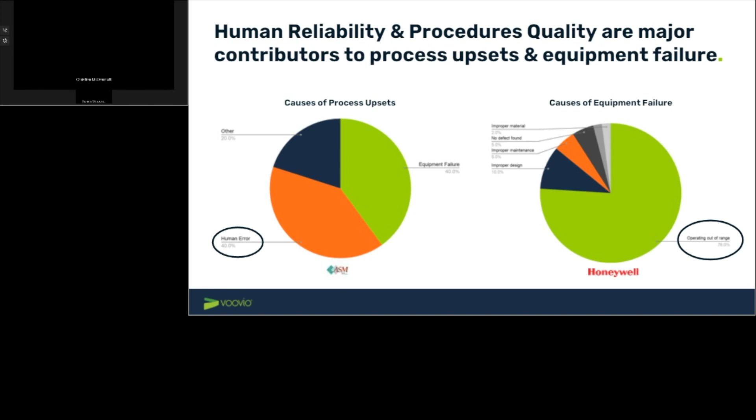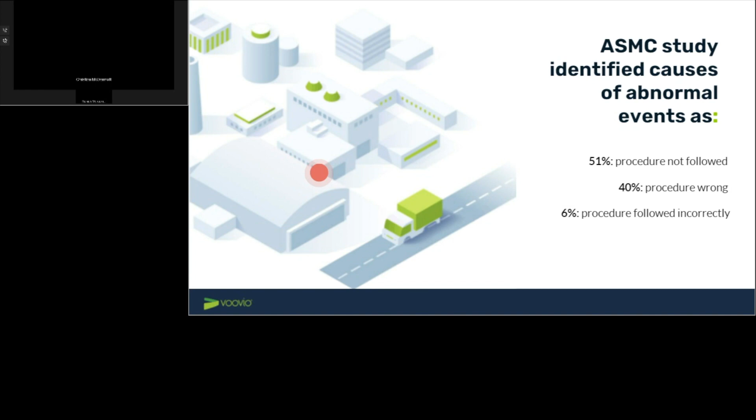According to some more data from the ASM consortium and Honeywell, we know that a significant cause of process upsets is caused by people. We're human, we make mistakes. And when you actually look at equipment failure, the major contributor here is how we humans operate that equipment. And we know that a major root cause of misoperation is actually related to procedures, so that they're either not used, they are wrong, or they're not followed correctly. And this is where our webinar today will really focus on: how can plants improve that interaction with the equipment and the overall effectiveness of people who have to operate that equipment.

So what's the solution? Well, we're going to show you a solution in a second, but let's remember, technology and automation will not solve this people problem we are talking about. Why? Because you cannot automate all field operator tasks. There have been studies done by McKinsey and others that over half of those tasks will still require people.

And Francis will be able to relate to this slide very well here because he lived through operations for 30 years and in plant leadership roles. The more we automate our processes and the more reliable our equipment is, the fewer opportunities to learn from experience exist. So the question is, how can we expose field operators to all the situations and procedures they may have to execute in such a way that they learn and know them? And how can we improve procedure quality, clarity, and adoption?

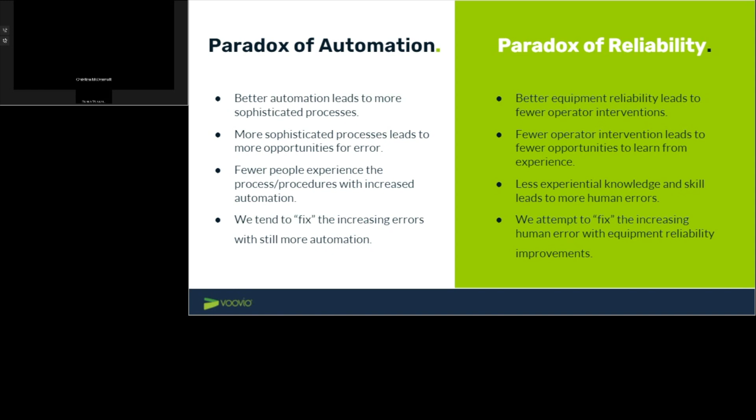You know, the industry has been very good at focusing on equipment reliability, availability and productivity of the assets. But what about the people? And this is where we're going to focus on. So I'm going to share my screen. So give me just 1 second. And we're going to talk about the knowledge automation platform.

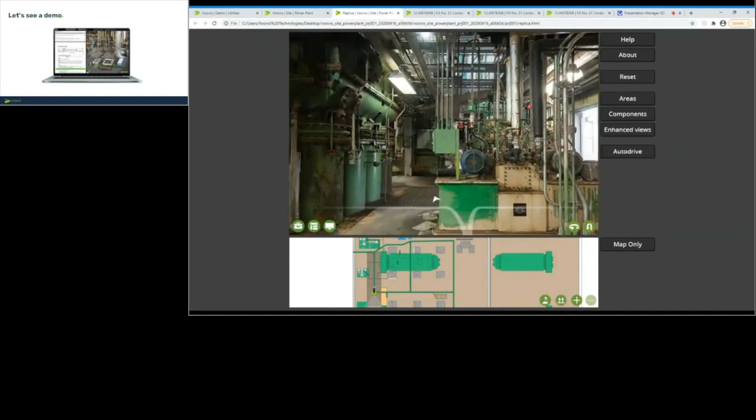We're going to show you how you can have a knowledge automation platform for your field operators, starting with this digital replica. I'm sitting here remotely, logged into my laptop, and I'm going to walk through it. This is the basis of the system we're about to show and explain. It's a real plant environment, accessible on any screen, tablets, laptops, whatever. I'm using a mouse here to walk through a digital replica of a real plant.

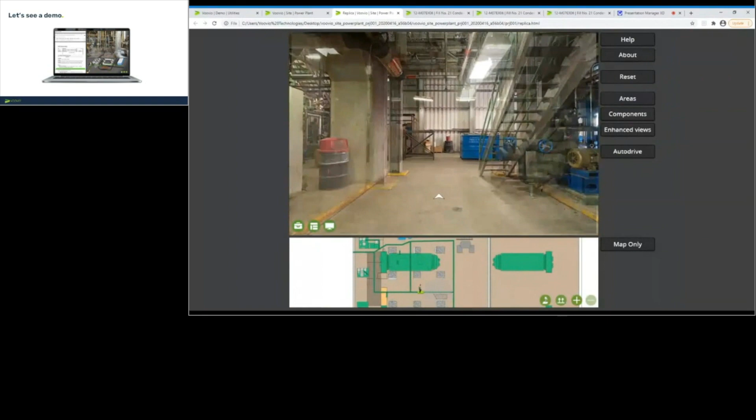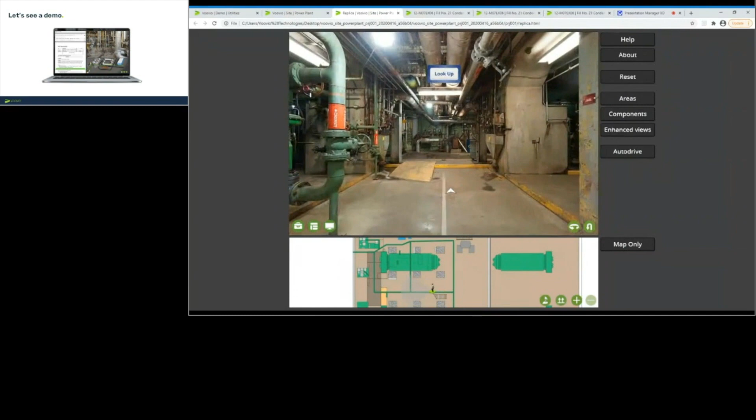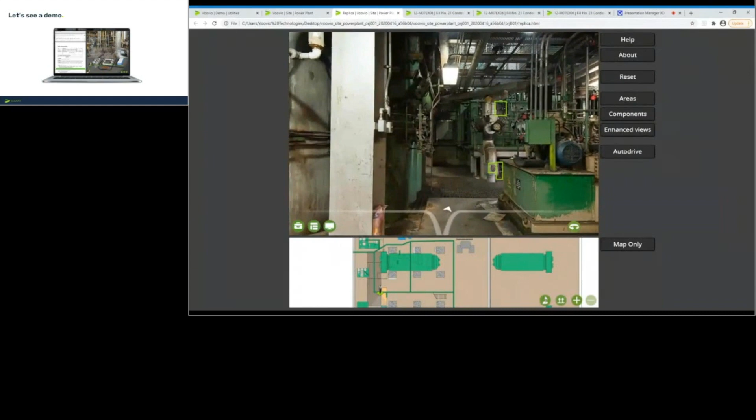The unique thing here is this is built using single images, so it's photorealistic, a real representation of the plant. You have the same degrees of freedom as you would in real life in terms of being able to walk around, navigate, and interact with the equipment. You can turn corners, follow different pathways, even look around at any location. You really have that immersive experience.

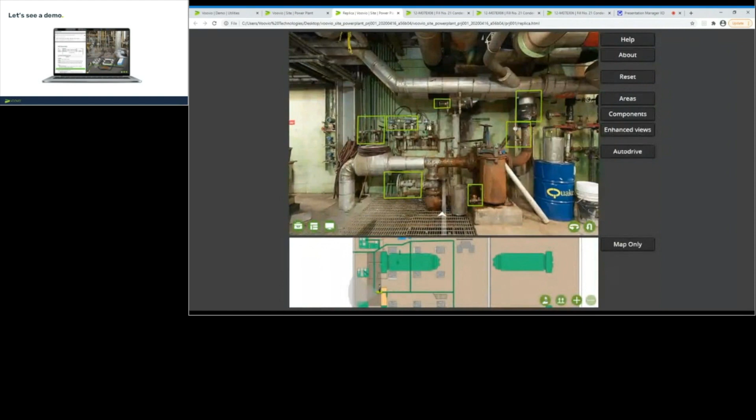Field operators or maintenance technicians, when they walk around the replica, will see tagged pieces of equipment. In this case we've got valves and instruments, but you can also tag larger items like vessels, compressors, pumps. You'll notice there's a label when I hover the mouse over it. When we're in this detailed view, you get a very close-up view of that item. Importantly, we can also simulate the real functionality of that piece of equipment. In this case it's a wheel valve, but there are tons of other things that can be replicated: control panels, switches, lights going on and off, pressure gauges, hoses, bleeds, plugs, you name it.

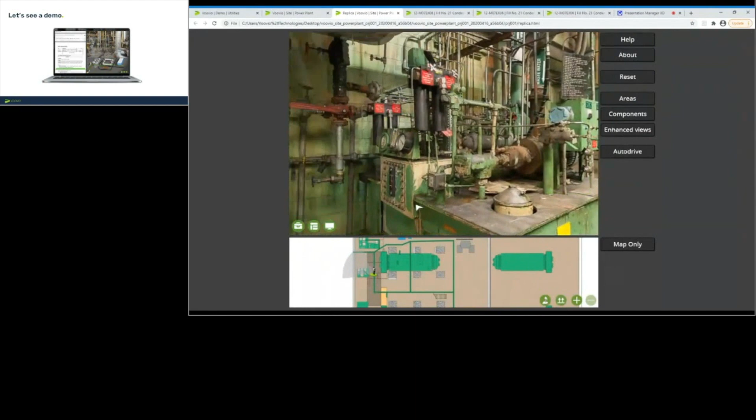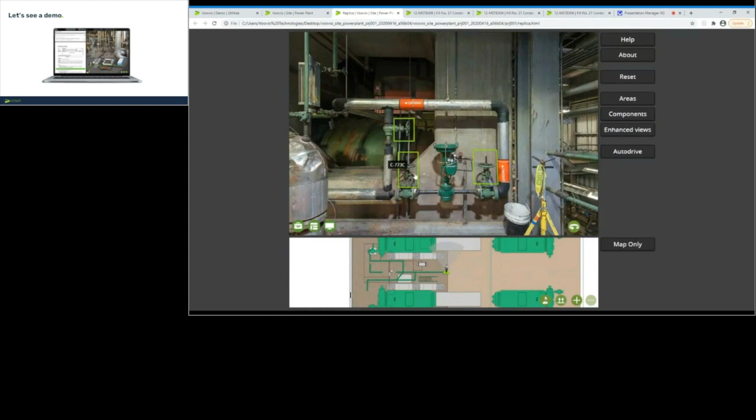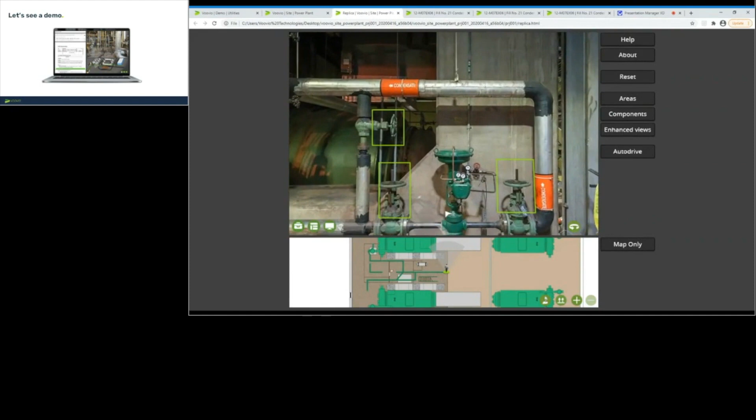A really important feature here for field operators and anyone in the plant environment is that all these tagged items are listed in a searchable index. So if you want to find, for example, a recirculation line, you can just type it into a search box and click on the item you want to find, and it will take you straight to that component. Operators can find things independently, regardless of their level of experience. And remember, this is accessible 24/7 on any device, so you no longer have to rely on those highly experienced SMEs for everything, for planning, for debriefing, and so forth.

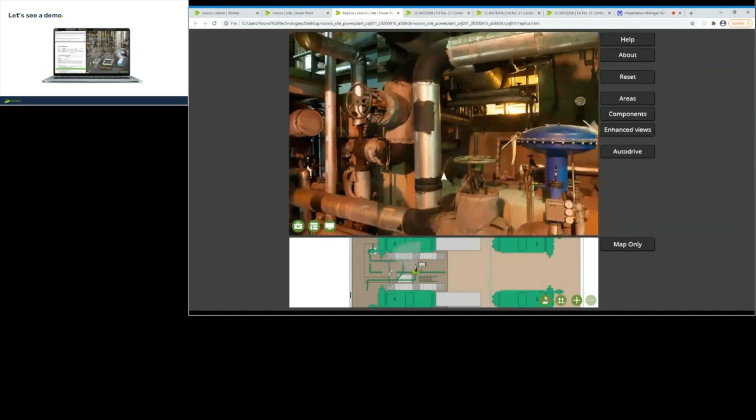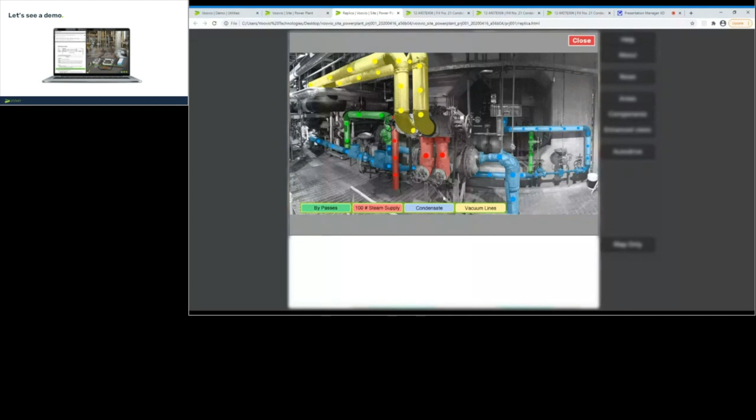The other thing I want to highlight are what we call enhanced views. These can be embedded in any part of the replica and really bring the equipment to life. You'll see these color-coded icons at the bottom, and you can toggle between them, activate them, and turn them on and off. Here you'll see the lines, the flows, have been activated. Taking that a step further, what is really popular are complex manifolds, in this case. We can activate the flows and even the valves, so we now have interactive valves in this enhanced view. This has a huge onboarding and refresher value, and any level of experience can benefit from this.

You'll see in the bottom right here, the valve I can click on and open, and you'll see the flow now corresponds to the state of that valve. You have an unambiguous view of a section of your real plant, which has huge value. So that's the digital replica. This is important because it's the basis of what we're going to continue showing.

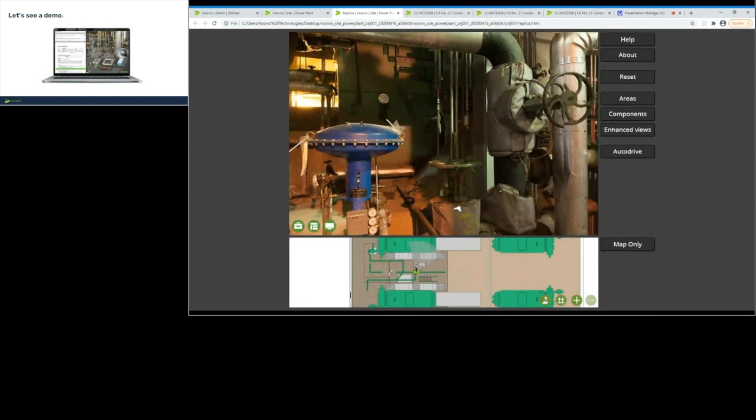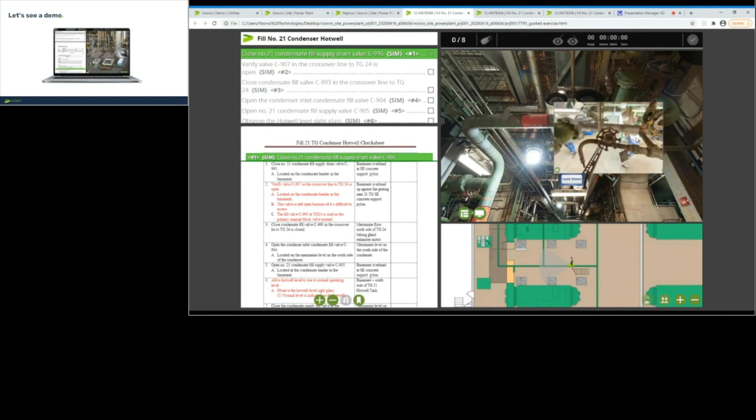So let me show you how this works. I'm going to execute the first couple of steps here. You physically have to interact with the valves, confirm you've completed step 1, and the system now takes you to step 2.

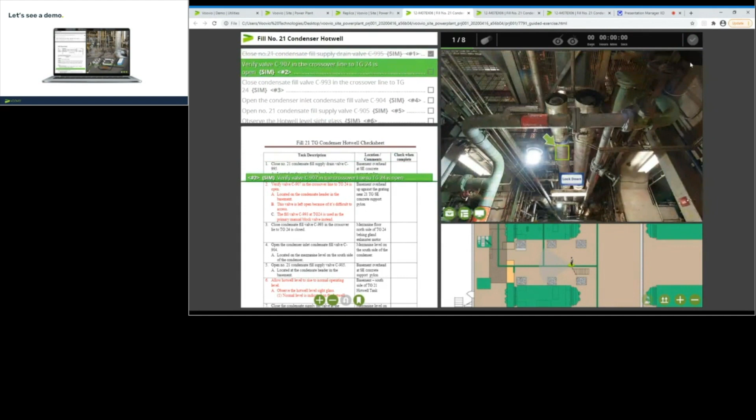You'll see there's a green arrow guiding you through the procedure. It's very much like a virtual subject matter expert talking you through it. You even have these knowledge snippets that appear—in this case, a piece of text that tells me why this valve is always left open.

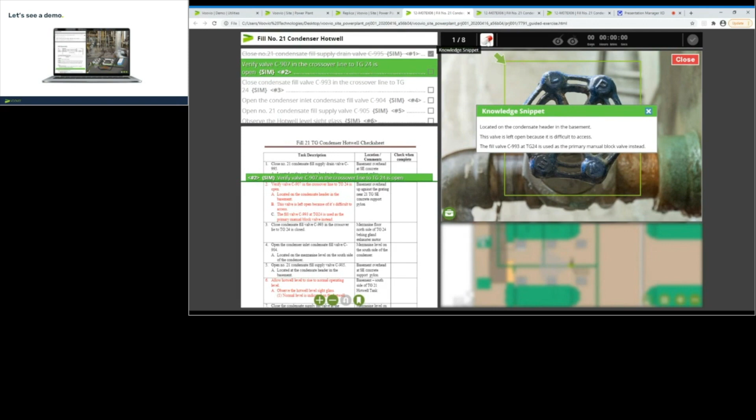This is a knowledge capture and transfer tool where you can add videos, cautions, warnings, notes, and other data important for this specific step. So knowledge snippets are very powerful for enhancing the knowledge and competency of operators across procedures.

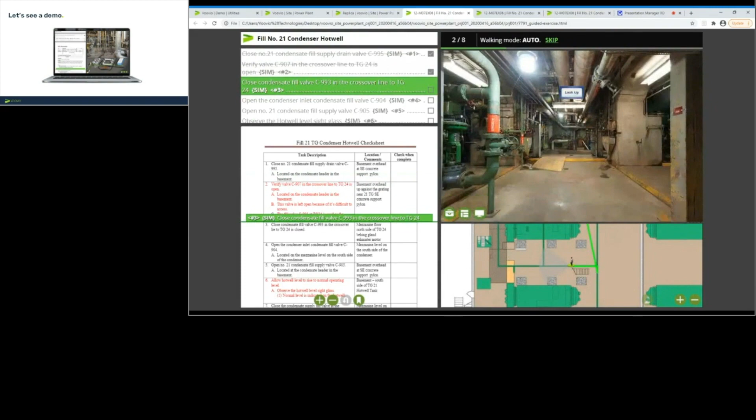So I finished that step, and now it's going to walk me to the next step. It's very much a self-paced guided simulator designed for all levels of operators. However, it's a great onboarding tool, or useful to review a startup procedure before you have to execute it in the field.

We actually have some customers now using Voovio as they prepare to start up after Storm Uri. Unfortunately, a lot of plants in Texas and Louisiana had to shut down, so this actually enables them to be prepared and start up perfectly.

But what about measuring the skills and competency of organizations for specific procedures? Now, this is a test simulator, the same as I was showing you before, but the difference here is that you get immediate feedback on what you're doing correctly or incorrectly.

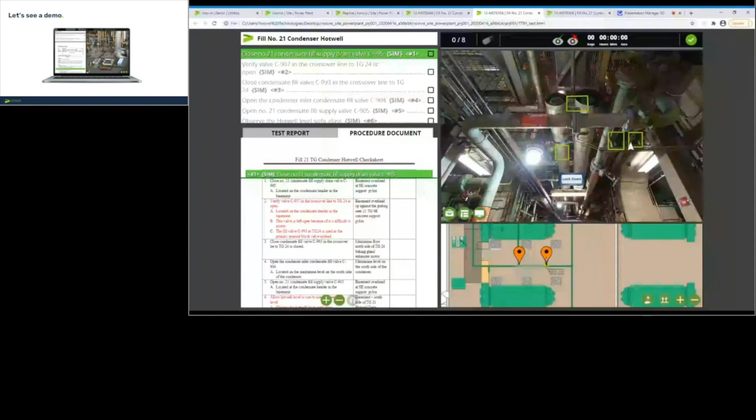So let me do the first step correctly. I'm going to close this valve—pretty sure this is the right one—and confirm. You'll see on the left I get immediate feedback saying the action was completed correctly.

So what about making an error? Let me walk down to where we were earlier and interact with the same valve, and I'll crack this one open instead. Confirm, and you'll see I get immediate, real-time feedback again, with a piece of data showing me which valve I touched, which was the wrong one.

Now, all of this data is really powerful. First of all, it's visible in the form of a report that the operator will see and can download, but it's also automatically saved in a cloud platform, and you'll see my record on this procedure.

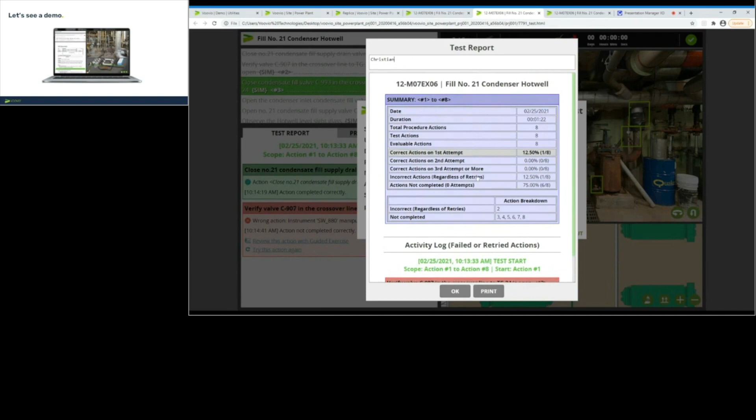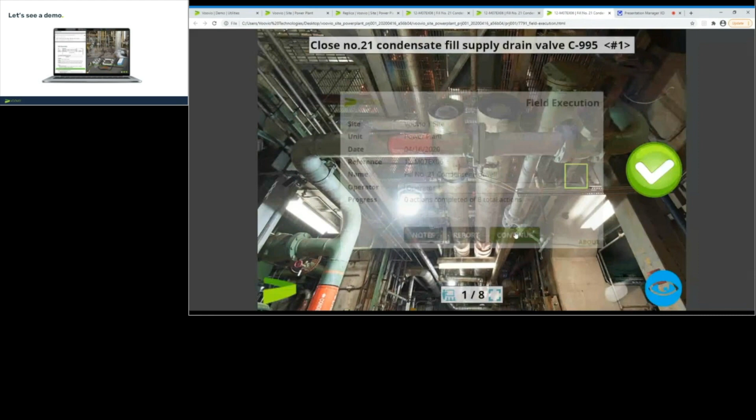Very powerful. Fran's going to talk more about the data that's actually analyzed and available in a kind of people dashboard later, which allows you to reflect on and measure skills and competency on specific procedures. So that's the procedure training part—learning, practicing, and testing.

But what about when you go into the field and you want that visual aid? What you're looking at now is something you'd have on a tablet or another phone device. Very easy interface, and this is all drawn directly from the simulators. You have your action check step at the top, and an image drawn from the digital replica where you find this component or piece of equipment.

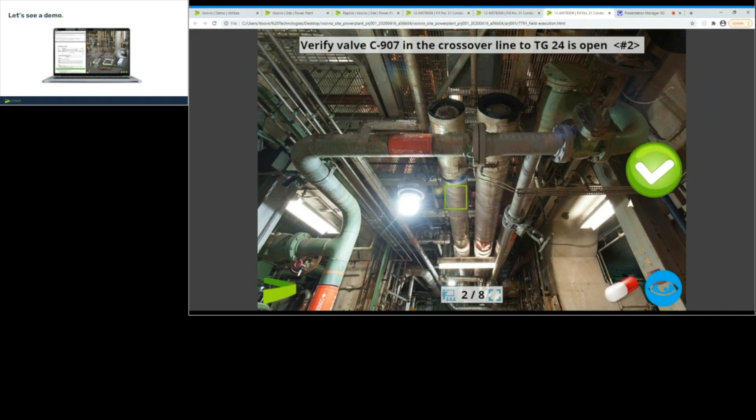And if you need a detailed view, you can toggle between the detailed view and the pathway view. So when you're in the field, you really have that visual verification that you're in the right place. You press the green checkmark to move to step two, and of course you can access knowledge snippets in the field as well—incredibly valuable there.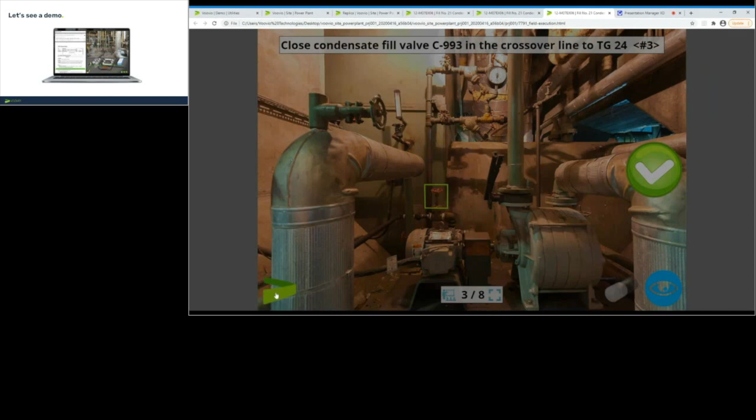There's also a note-taking capability you can utilize. Again, all of this data is stored and captured in the cloud and is readily available, analyzed in the form of dashboards and reports. I'll quickly show you the report that's generated at the end, with all the information including timestamps, notes, and by whom it was completed.

So, a very powerful tool. With that, I'd like to pass it back to Fran Montemuro, who's going to continue the presentation.

Okay, thank you, Christian. So let's talk about the benefits resulting from a Voovio project implementation. Some of the benefits realized with our customers—the first one Christian spoke about was procedure clarity. This chart depicts on the y-axis the number of procedure steps in a given procedure, before and after a Voovio implementation.

If you look at the second set of bars, when we went to the site for this procedure, there were 28 procedure steps for the operator to execute. Once we walked this particular procedure with the SME and detailed every executable action the operator needed to perform, you can see the orange bar was well over 125 executable actions for the operator to perform.

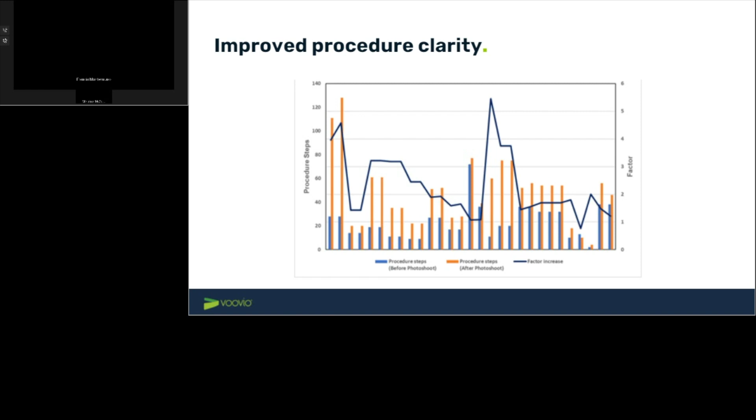So the result is very clear, concise, executable actions for the operator. There's no ambiguity with that procedure or any of these procedures following the implementation of Voovio.

Another benefit our customers are realizing is improved competency over a shorter amount of time. This chart depicts competency on the y-axis and time on the x-axis. The gray arrow shows what we find in most petrochemical and refinery sites: onboarding, orientation, job shadowing, and then some type of verification.

With Voovio, the time to competency is accelerated. Productivity gains upwards of 50%. That results in less overtime and less costs associated with onboarding or qualifying that operator in the area. Why is that? Because operators can execute these procedures independent of the availability of an SME, practice, and then when ready, take a standardized test to document and show their competency.

In addition, as Christian mentioned, there's the field execution tool. So we are seeing competency gains of 100% because they are practicing entire procedures. They don't have to wait for equipment to be down or to be available.

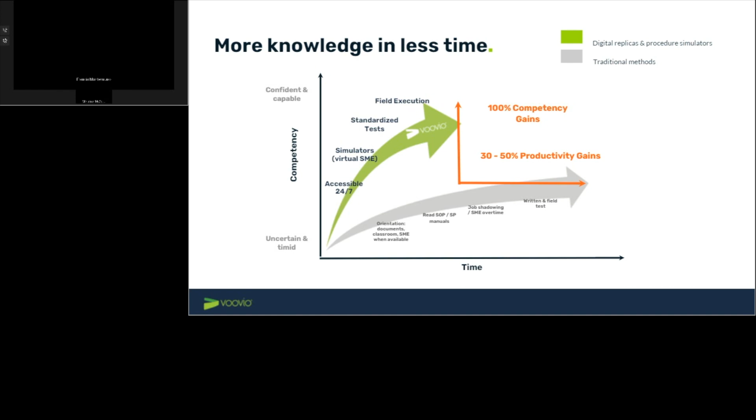Some additional products Christian mentioned relate to our automated dashboard. We are able to measure the competency of operators on a shift, or of the entire organization, by assigning them the modules, letting them practice, and letting them demonstrate their competency on the procedures.

What you can see here is that over time, the initial assessment, shown in this blue curve, has a very wide standard deviation, with knowledge from low 50 test scores all the way up to 100%. So a very typical organization - you have some operators on shifts that know the process and procedure very well, and others that do not. Once we give those operators, those organizations, time to practice, we go back typically in about a month and reassess competency.

And you can see in this green line to the right, a much smaller standard deviation. So again, this automated dashboard available to the organization is a great tool for the learning and development leaders within the organization to understand where their organization is and where they need to get to.

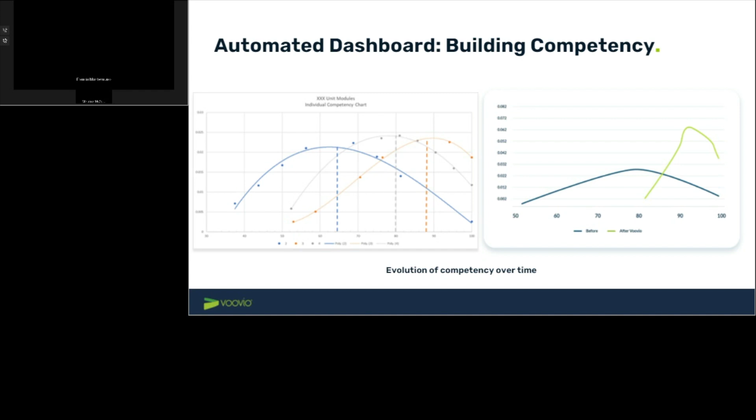Along those lines, another tool available to the L&D managers or ops managers is an assessment of where their organization, the shifts, are performing within a procedure. What this depicts are those procedure steps that are commonly missed within the organization when executing.

It could be a number of reasons - it could be a misunderstanding of what that step is asking the operator to do, or it could be an example of practice not consistent with the procedure. But it's data that the L&D leader or the ops manager can use to drive the organization to standard execution.

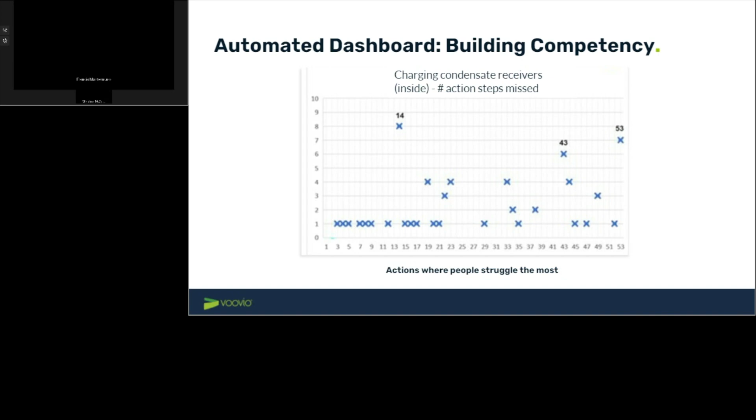So now I'd like to go over some case studies, some results that we've realized with our customers. I have 4 case studies, each one a little different.

This first one has to do with a plant that supports a very large refinery. They provide different gas streams to the refinery, so reliability is of the utmost importance to this plant.

And they were having issues - two issues that they needed Voovio assistance with. One was onboarding. The plant, located in the Gulf Coast, was realizing high turnover, onboarding new operators, and the time to competency was too long for them.

So that, in addition to some issues they were having with misoperation of the boiler feed water pumps, was causing unplanned downtime. This organization was able to implement Voovio, use the Voovio simulation modules prior to execution, prior to working or starting up the boiler feed water pumps, and eliminate those unplanned events.

In addition, they were able to use Voovio for onboarding the operators to decrease the time to get the competency and to qualify.

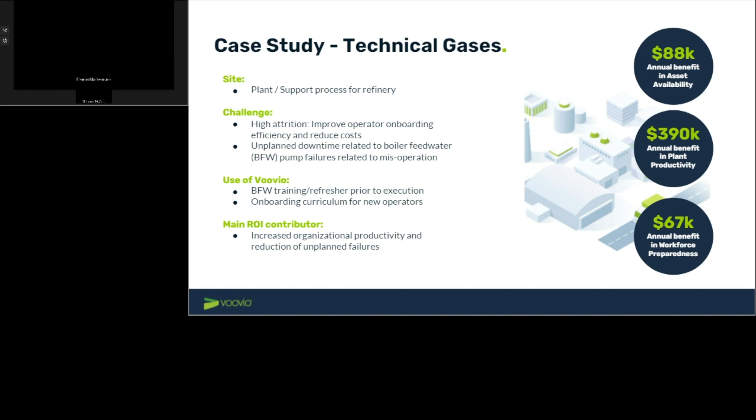The next example is a petrochemical plant producing nonwovens, and their challenge was related to executing the procedure in a standard manner and getting to first quality in a timely manner. Some of their challenges related to improper setup of the equipment prior to startup. Some of it was that, as they were starting up, they weren't hitting the right process parameters, causing non-standard, second-quality production.

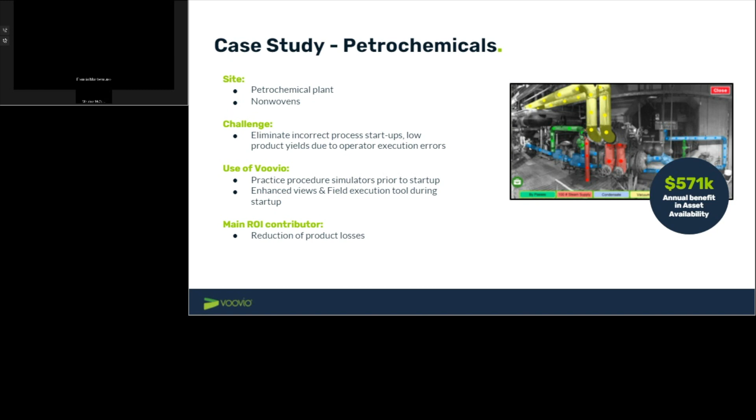So with Voovio, we were able to simulate this procedure, allow the operators to practice prior to startup, and then use the enhanced view tools as well as the field execution tool as they were starting up to ensure they started up on time and at first quality.

The next case study is related to a refinery. Part of the unit was struggling with getting their shutdowns, startups, and equipment swaps done in a way that they were not leaving valves open or losing primary containment.

So with Voovio, what we did - the line walk process was significant in this case.

We were able to go in there, walk this process with the SME, identify every actionable step associated with closing valves and isolating the process as the operator was executing the procedure, to ensure there was no lost containment, loss of the process, causing those very high and costly releases resulting in regulatory fines.

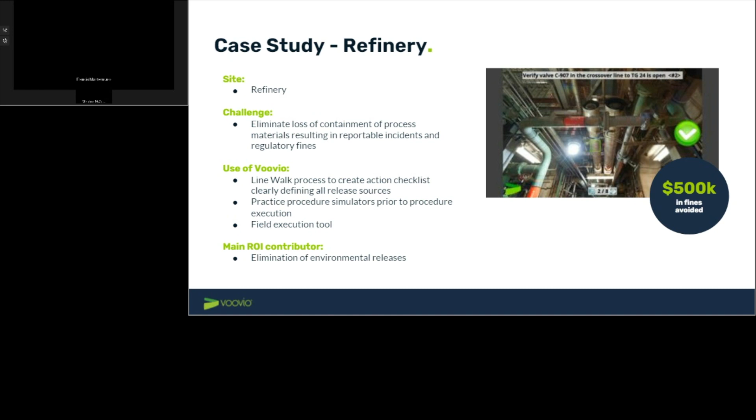The last case study is a unique one where we're working with the refinery, our customer, and they're using Voovio to train third-party trucking companies, training the actual truck drivers prior to arriving on site. This has afforded a couple benefits to our customer: they can train these truck drivers prior to showing up on site, and they become familiar with the operation at this specific site, minimizing the overtime required to train them once they show up.

These truck drivers are then familiar with the operation, and it has reduced their number of spills and equipment damage associated with loading the contents at the refinery, causing a significant improvement in asset reliability because they're no longer spending time cleaning up spills or repairing equipment.

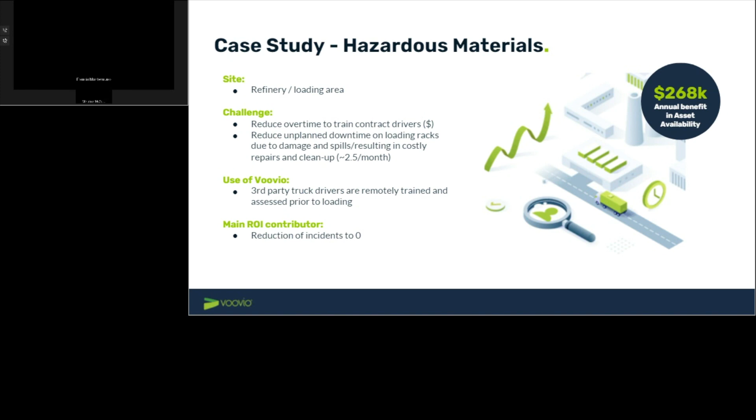So with that, let's talk about implementing Voovio. A couple more slides. So Voovio, what's needed? We need SOPs, we need your procedures.

They don't need to be reviewed, revised, or gone through a procedure improvement or revision process. The Voovio line walk process completes that for our customers. We will take whatever procedures exist, and our engineers will arrive on site and walk the procedures in their current condition and create those actionable steps, providing that procedure clarity.

The time we need for that initial review, the initial line walk process, is typically 3 to 5 days, and then we only need a couple hours from that SME throughout the project cycle. A typical project takes 12 to 14 weeks from the time of photo shoot to project delivery, and includes everything Christian covered, as well as our ops team working with the customer to ensure adoption of the Voovio products, help with the automation dashboard, and support that adoption.

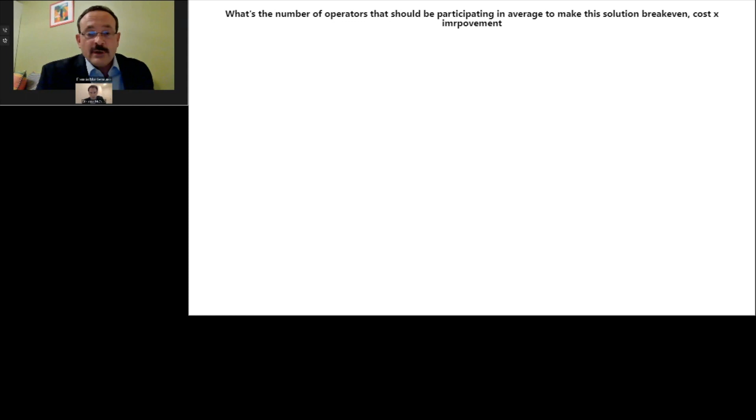Yeah, I mean, you touched on it, Christian. It really gets down to the site, the unit, the business need and how to address that need. Some case studies were about asset reliability, some related to unplanned downtime or unplanned loss of process, regulatory events. It could be related to onboarding operators due to high turnover. So the number of operators is probably not as significant as truly understanding the business need. Once we understand that business need, and if it's 4 operators per shift, Voovio will help ensure the competency of those 4 operators to achieve that business solution and drive those costs, asset uptime, or eliminate the unplanned events.

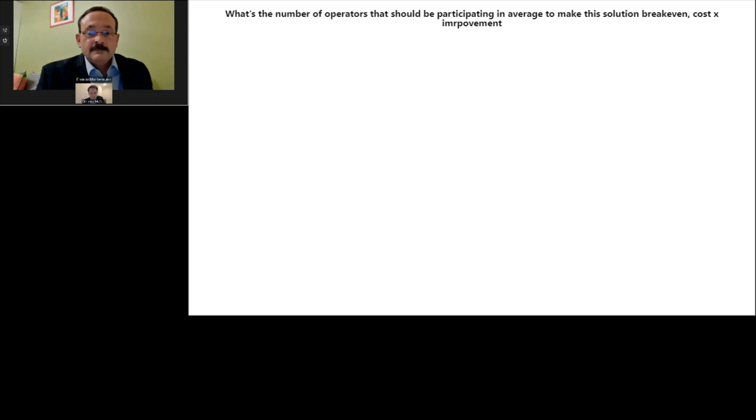Great, thank you. Next question is, I see the benefit of plant-specific simulation, but do you have off-the-shelf generic simulations as well?

I can start this one. The whole technology is really designed for plant-specific and equipment-specific simulations. But that said, we have customers that have done generic scenarios using their equipment, for example lockout tagout training for onboarding new operators, or other scenarios where you have a piece of equipment that you can use as an example, which is relevant for other sites. So in that sense, generic simulation works as well, but it's not necessarily off the shelf. That has to be customer specific or site specific.

Fran, is there anything you want to add? No, nothing to add. We really want to understand the unit, and then from the unit we can build generic scenarios, like you mentioned, lock, tag, confined space, whatever it may be. But really, it's unit and plant specific, and then from those projects, if we need to build something generic, we could.

Great, thank you. Next question is, how often are updates required annually? Fran, do you want to take that one? From a plant process standpoint, really it's dependent on the unit. A lot of units go through an annual turnaround, and they may need to update the replica and or the procedure once a year. But if they have changes throughout the year, there are no requirements; we could update it as often as the customer needs.